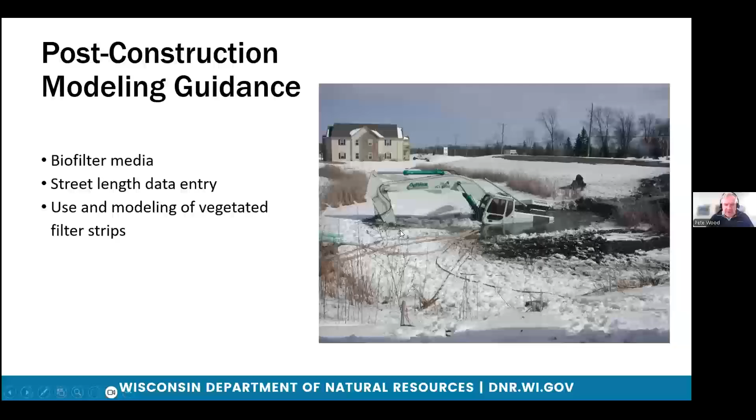All right, so this is one we've been working on, it seems like forever. Our MS4 swale modeling guidance is very old—it was published initially in 2010, so about 15 years old. We've been talking about doing updates for years. This is primarily for MS4s doing TMDL compliance modeling.

What we did with this guidance is keep it very similar to the existing guidance relative to grass swales, but over time, especially with TMDL monitoring going on, people have tried to model existing infiltration basins and dry detention ponds, and questions have come up. So we added essentially separate sections in this guidance for swales, infiltration basins, and dry detention ponds—again, this is to model existing practices for MS4 compliance. Hopefully it answers common modeling questions we get.

Another change we're making in this guidance is putting some criteria in for swale infiltration rate field testing. Some of you who've done this kind of work know it's become very popular to better quantify the value of infiltration in existing grass swales. We did try to include some criteria about modeling existing grass swales in the infiltration site evaluation tech standard 1002 a couple years ago. We got a lot of feedback on that, so we ended up removing the MS4 portion from that tech standard, and now we're bringing it back.

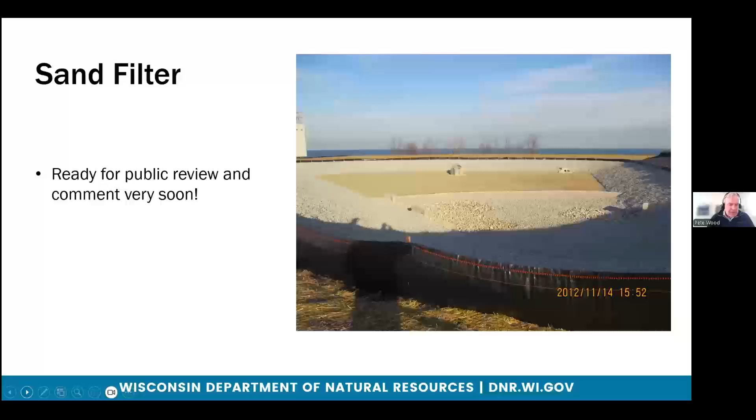That's coming soon. Related to that, the sand filter tech standard not only tries to eliminate that liability with compost and phosphorus, but also to have some enhanced phosphorus options. We're going to do this in the form of a tech note. The tech standard is going to mention additives, things that could be added to the sand to actually increase phosphorus removal. We're developing a tech note to go with that to talk about some specific options.

This particular product, zero valent iron, is an iron aggregate that has been shown in research in Minnesota to be quite valuable for enhanced phosphorus removal. This particular product out of Connelly is approved for use in Wisconsin based on toxicity testing. It's being used in Calumet County on a project, so it could be used right now. In general, it's about no more than 3 to 4% of the total mix would be this iron aggregate, and this stuff comes out of Chicago. So based on the research done in Minnesota, we have a lot of hopefulness with this product working.

Another one we've been talking about is biochar, which is just wood ash processed in a certain way, added to the mix the same way. For both of these products, the city of Milwaukee is going to start a project by retrofitting an existing biofilter to become kind of a research facility. We've been trying to give them some guidance on what types of engineered soil mixes should be evaluated. Right now, they're definitely going to have a couple different ways of introducing the iron filings, and also recently it was discussed trying to do a filter bed that also had the biochar to actually quantify the value in Wisconsin. So that's going to be a work in progress in the city of Milwaukee.

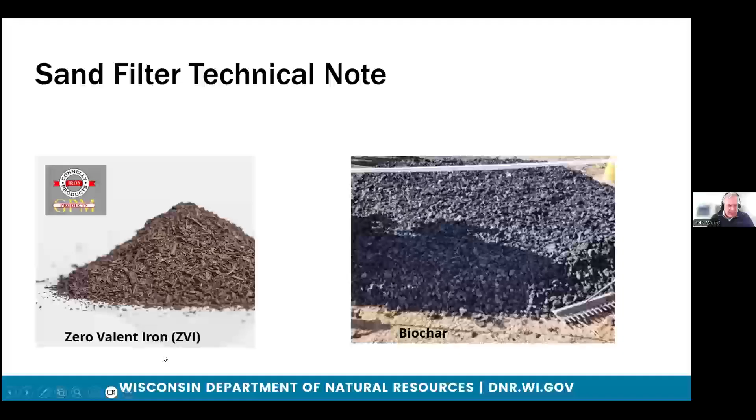There are a couple more, and in this whole webinar that Waukesha County is putting out, there's going to be more discussion about the enhanced phosphorus additives. Amy Mincer has been working on these tech standards, and they're pretty much done also, but she wanted to give a little delay so we don't have essentially four tech standards for public review at once. She's anticipating these would be posted for public review in a couple months.

The first one, and I'm not going to talk in great detail about it, is based on a flow, almost like a wastewater treatment idea, where a coagulant, alum in most cases, is added to the stormwater, mixed in a certain way, and then introduced to a stormwater pond. Phosphorus and TSS removal would be enhanced, so more treatment would occur than with a standard stormwater pond.

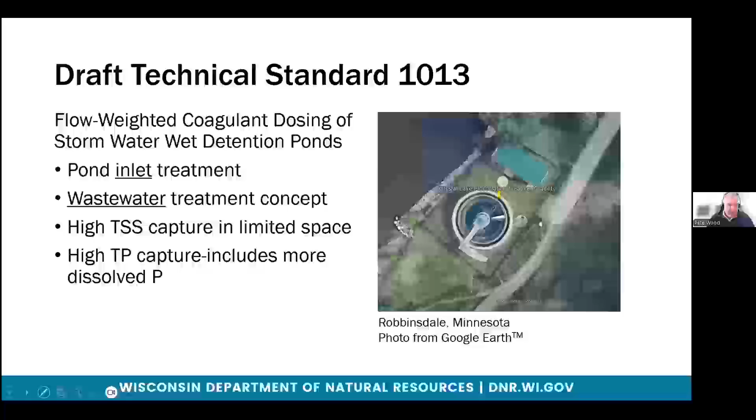So that one's coming, you'll hear more about these options again. The second one is more of a passive application, whereas the first one was active. This is more passive, where you would actually dose a stormwater pond, and you'll hear more about this.

It's more of a maintenance idea, similar to a lake treatment concept, where you're trying to use the coagulant to keep phosphorus from being lost from previously settled sediment. There's research showing stormwater has phosphorus in it, and the settleable part sits at the bottom of the pond, but under certain conditions it can be released. That's what this one-time coagulant dosing event would help resolve.

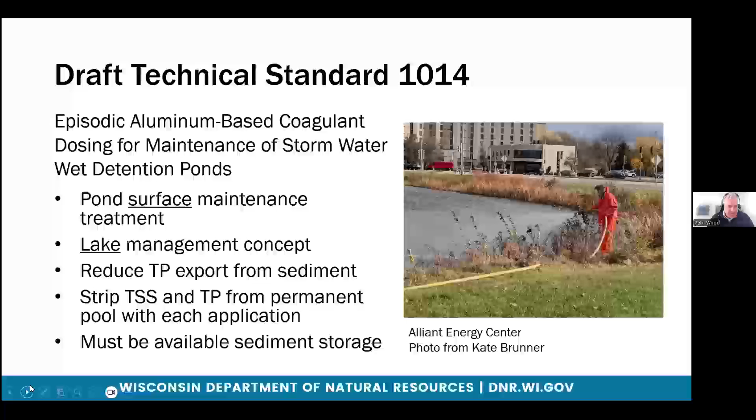A couple things we're going to be working on over the next couple of years: we're going to take the soil loss and sediment discharge guidance document, which is based on the USLE spreadsheet that generated that requirement. We're going to take another look at that and turn it into a tech standard, maybe coming up with a whole different concept. I think anybody who's worked with this tool, including within DNR, knows it hasn't been as smooth as we hoped. It's been used for many years.

I think we're going to talk about some alternatives through that process, maybe a different way of doing this, and add in some other concepts like construction sediment and construction sequencing protocols, having this tech standard cover some larger bases. So that'll be something you'll hear about, but as you've seen with previous tech standards, it takes some time to get through that.

Another one I mentioned last year is our urban soil health team that we pulled together to look at how to improve the infiltration capacity of existing urban soils. That team was able to generate a foundation for a tech standard, so we think we're pretty far along, and because we've done that initial work, we could get moving on a tech standard and get it done fairly quickly.

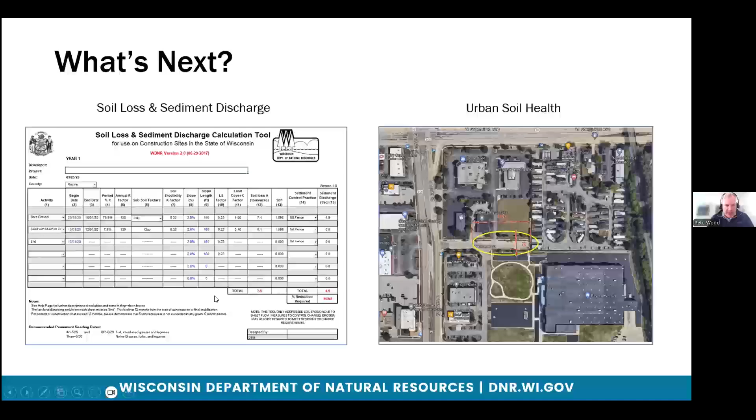Now, finally, I'm going to wrap up with some MS4 updates, both from a statewide perspective and a local perspective. I'm not going to cover everything — as you guys know, it's a big program — but just some of the points of emphasis.

I was able to get some feedback from Brooke Robinson, our statewide MS4 coordinator — some of you remember her locally. We've been doing audits around the state for a certain number of MS4s, and this is what she reported for the common issues coming up during those audits. I want to let everybody know, so if you're an MS4 manager, these are things you can start thinking about to be ready for a future audit when DNR comes.

One issue, maybe not surprising, is MS4 construction site inspections. One problem they're finding is the municipality not inspecting sites per the permit, at the frequency prescribed. Another issue is MS4s aren't doing inspections of their own projects as we'd like to see, like road projects or things like that.

Another item is management of street sweeping and catch basin waste. This is always an issue for any municipality — even if you're hauling it to a landfill, what do you do in the interim, how do you dewater? This has been coming up, whether it's being appropriately managed, because it's highly contaminated, considered a regulated solid waste, so it has to be handled differently than soil. We want people to be sensitive to where they're dewatering and how that's handled, because it's essentially a wastewater coming off that material.

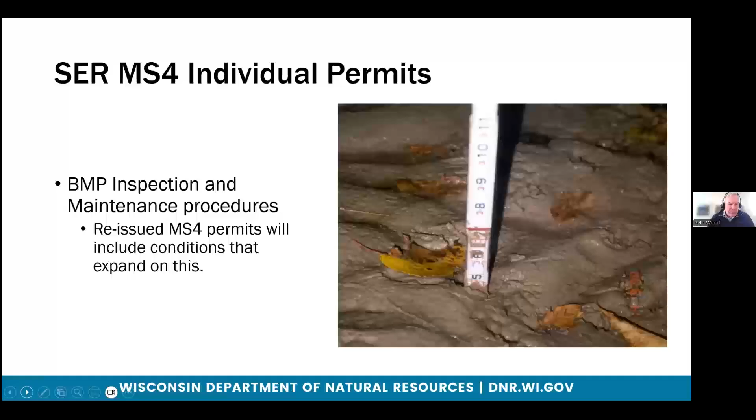This is something I got from Sam also, and it makes a lot of sense when she mentioned the big picture - everyone understands this. We've been permitting these BMPs for development projects for the last 30 years. A lot of them are in need of maintenance, and that's where the hard part is - they're not going to continue to function to their best ability unless someone's inspecting and maintaining them.

So that's Sam's whole focus on the permit drafting - to have a municipality go through and be able to describe every step that's needed to result in a BMP being maintained on private property.

One of the concepts she's including in the permit language is making sure that someone identifies who's going to be doing the inspection and maintenance of a particular private BMP - whether it's the municipality, the pond owner, or the private owner of the BMP, or some combination of those. That's one thing she's seeing lacking - a clear identification of who's responsible for what.

And then there's the process of verifying - let's say a homeowners association is responsible for doing the inspection - that the municipality has a procedure to review that information, whether it's submitted from a private entity or not, and then figure out what steps need to be taken if something is found, like a pond in need of dredging. What is the procedure within the municipality to make that happen and compel compliance, as she's been calling it.

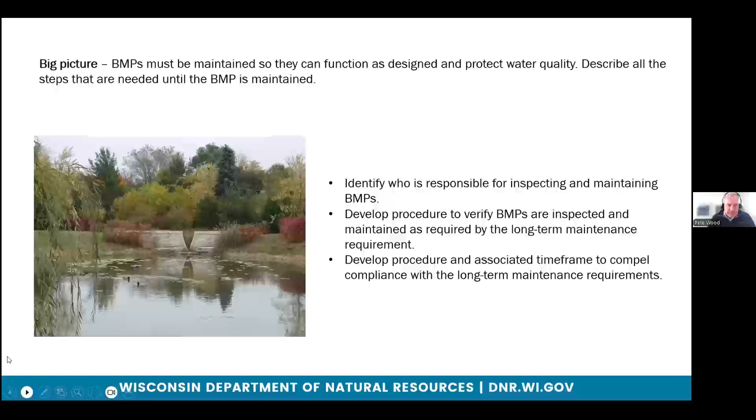So these are all things she's trying to develop better language to address in the permit itself. Tying into this, in the slide from last year, we had implemented over the last year - these tasks here are high-level thoughts on how we get to a better way of doing long-term maintenance, guiding it from the state level, so that we are actually having BMPs maintained.

And we made some progress. We had an intern who looked at all of the current plans we have on record for how municipalities deal with managing long-term maintenance on private facilities. Unfortunately, we had a really hard time finding really well-developed programs.

That's one of the reasons why Sam's trying to clean that up. Even though we know municipalities are doing this work, DNR doesn't have a lot of access to really complete plans where we fully understand how the municipality is doing it. So we're going to try to move forward on that and provide some benefit.

Grace Barlow is going to talk at the end of the webinar about the MS4 BMP menu, so we're going to try to use that website to put up examples. This would be part of that. We're working with groups like Sweetwater and Root Pike WIN, who are also working with municipalities to tackle some of these things and improve the whole program, even though it's going to take many years.

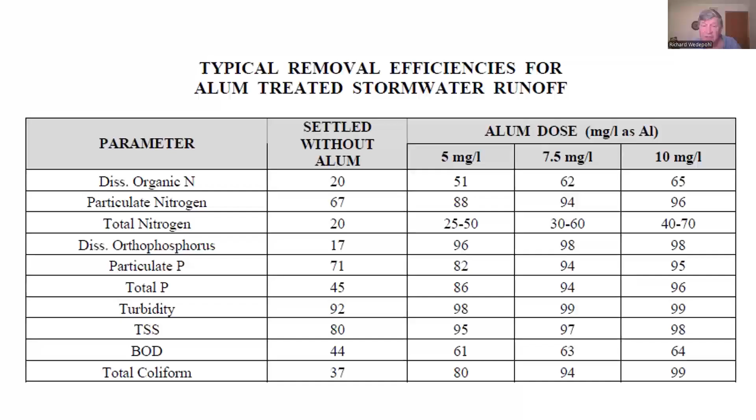We'll meet here to have a beer, come up with some great ideas, and several of the ideas we came up with here came about while we were having a beer. Sometimes we actually remember some of them.

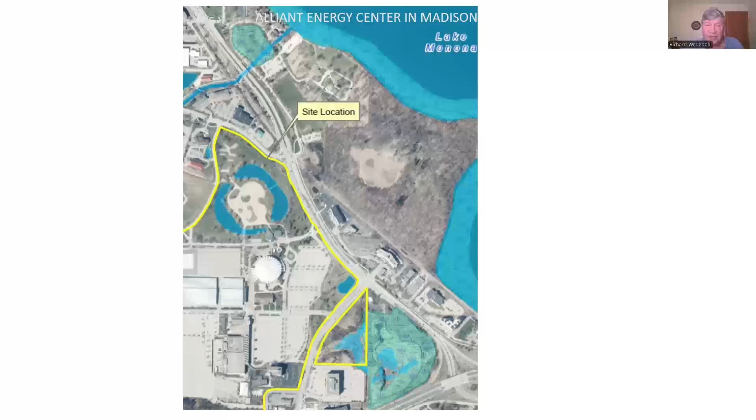All right, the project that Leif asked me to talk about: the Alliant Energy ponds, located on the Alliant Energy campus in Madison. Most of the stormwater flows in from the Alliant Energy Center into the west pond on the left-hand side, then goes over underneath the little bridge into the east pond. The east pond discharges into Lake Monona. This is a project that we ended up doing.

My friend Dave Marshall and I went out and looked at it and said, okay, I see why Kevin Connors—a retired land conservationist from Dane County who was filling in as acting director at the Alliant Energy Center—asked if maybe we could use alum on these smaller ponds, which are 5 to 6 feet deep. I said, well, maybe. He said, sure, it'd be nice to do something with these ponds. We've got the world's largest brat fest coming up here, with 100-some thousand people, along with a whole bunch of other things. It'd be nice to see if we can improve the aesthetics as well as capture some of the phosphorus before it goes into Monona. So we said, all right, okay.

Of course, we went out and took our samples, basically looking at total phosphorus. They're typical of the east pond, the secondary pond—total P was fairly high, 0.04. The west pond, where the stormwater came in, was fairly significant with phosphorus. The total area is about 5.5 acres, and these ponds are about 5 to 6 feet deep.

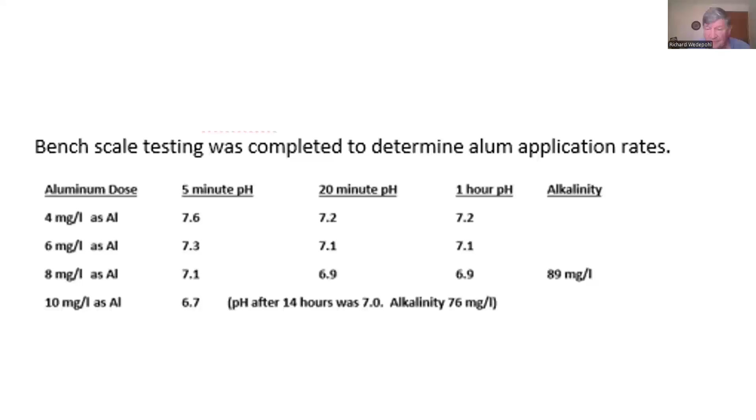The issue here, though, was Harry suggested, with ponds like this, you really want to get the sediment inactivated. How much should you put in? He said, well, you really want 40 grams per square meter of pond area. In lakes, people will look at as much as 50 to 100. They'll do sediment core testing and see how much phosphorus migrates out, how much you can apply to really lock up the phosphorus for a significant time frame in the sediments.

So we said, okay, we can do 10 milligrams per liter, no problem, keep the pH up to 6. But we'll need to do it 4 times to get this initial dose in these ponds to treat the sediment. So we had to wait till the alkalinity responded. We found out that the alkalinity from the sediments came back up, and we were able to retreat this pond within a week. So we spaced out 4 applications over the first season to get that dose we needed in the sediments.

All right, permits. I still don't know exactly when you need a permit for stormwater ponds. These ponds were classified by the Wisconsin DNR as lakes. They said, okay, let's get a permit. DNR has been permitting whole lake phosphorus and alum applications for many years now, and they've come up with a process, authorizing it under a low impact discharge permit. So it's straightforward, but it's still required a permit. So we went through the process and obtained a permit.

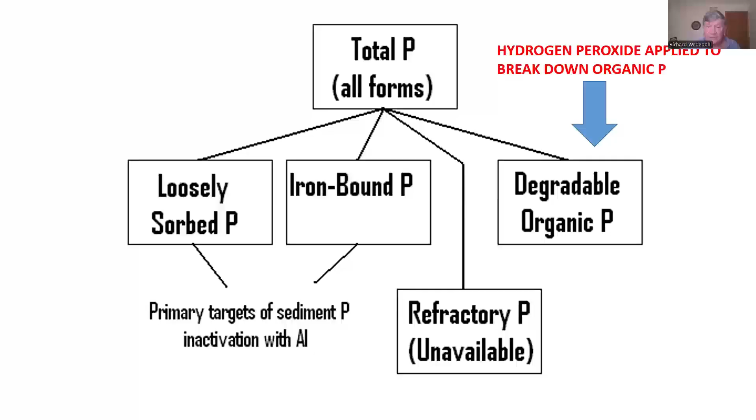So use hydrogen peroxide. I said, what's that? In Wisconsin, not many people are familiar with this, but this product, phycomycin, which is hydrogen peroxide, is labeled in Wisconsin. You can use it. It's an oxidizer, and it'll break down the algae and release all the phosphorus.

Well, why not use copper sulfate? We called an applicator, and he said, well, I'll just use copper sulfate. I said, well, copper's not as good, it doesn't oxidize it. With copper, you got to watch out for oxygen depletions as the algae decays. He said it's a little more expensive, but it's a great thing to use.

So we got another permit, an aquatic nuisance control permit, and hired an applicator. Here he is applying the hydrogen peroxide, basically with like a lawn spreader mounted on the back of the boat, and he just drove around the pond over all of the filamentous algae and applied the hydrogen peroxide.

It was interesting to watch. It did not take very long, just maybe 5 to 10 minutes after he applied it, and you can see how the hydrogen peroxide's breaking down this filamentous algae.

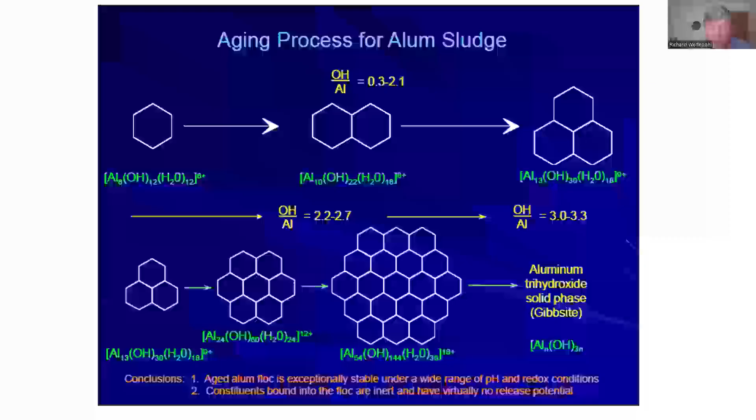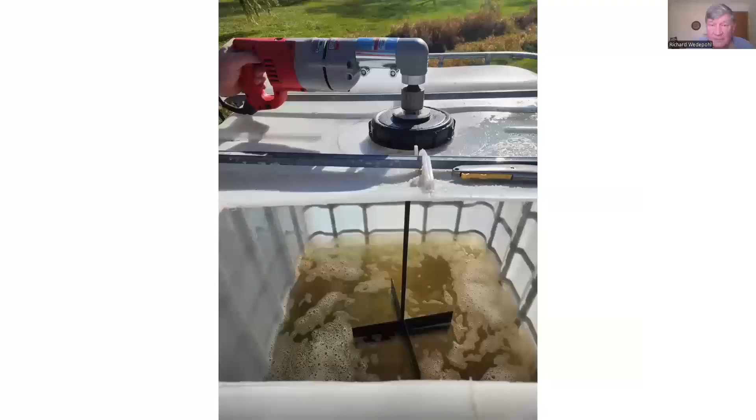One of the things we discovered is you've got to dissolve the dry alum. How much do you put in there? Well, you need about 80 to 100 gallons of water per bag of alum, and then you've got to use a paddle and mix it. We ended up paddling with a canoe paddle for a day and had a little problem dissolving the alum, and the local guy said, here we go. So they came up with this device, poured the dry alum into the container, and used it to get it dissolved.

Once we did that, we turned the pump around and sprayed the alum over the pond. This was a good site where you could access from shore, and you can see the floc developing there. You try to get it as evenly distributed as you can, but experience has shown that the floc will move around, and you get fairly good coverage if you spread it around relatively evenly. You don't have to be perfect doing this.

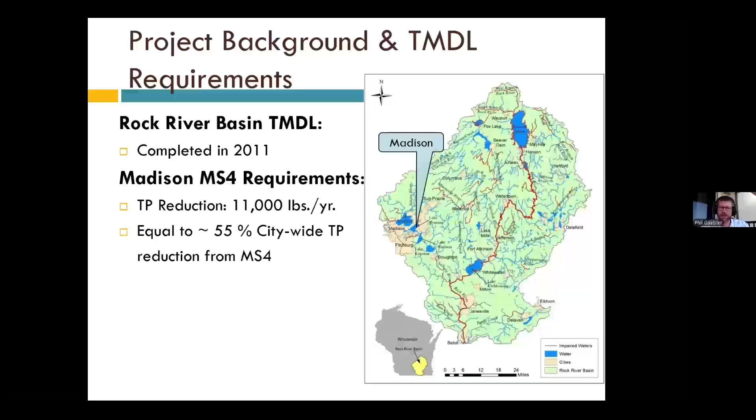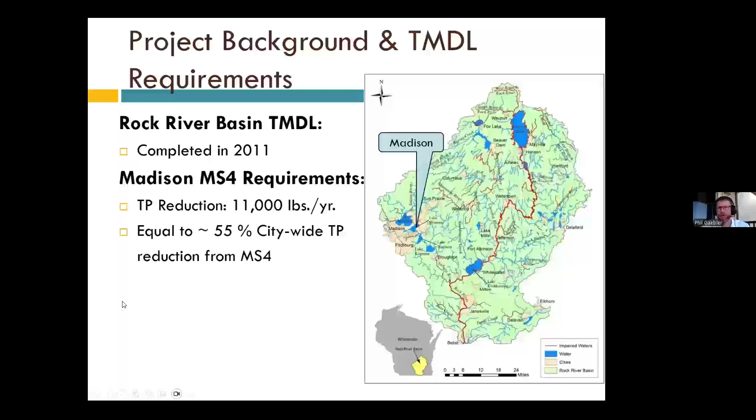There's also Lake Wingra in Madison that does not benefit from the phosphorus and sediment capture up in the Mendota watershed. That water bypasses Lake Wingra, so there's some effort and goals to reduce the phosphorus loading into Wingra. So if we look at the Marion Dunn Pond, it's over on the west side of Madison.

We have the Glenway Golf Course. If you've ever been there, some people call it Speedway Golf Course. But this area flows out into a small pond. It's a little bit undersized by today's standard, doesn't get 80% TSS reduction. Mostly medium density residential upstream. Pretty big watershed for the size of the pond, hence its low capture, but it's at 232 acres.

We really, at this time, didn't have any treatment upstream in this watershed other than street sweeping, and here that was monthly mechanical broom sweeping.

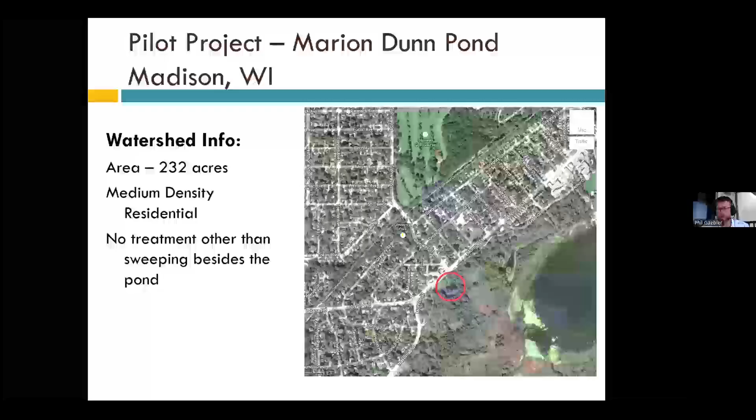If we look at that watershed, you can see almost all medium density residential, a little bit of commercial and a school on that far west side, and a large park in the middle. It all flows down and comes into the green area, which is Marion Dunn Pond.

Zooming in on that, we have a 4.5 by 8 foot box culvert. We then have the pond, and it has two outlets, 42-inch RCPs that then flow into moderately defined channels and eventually into Lake Wingra.

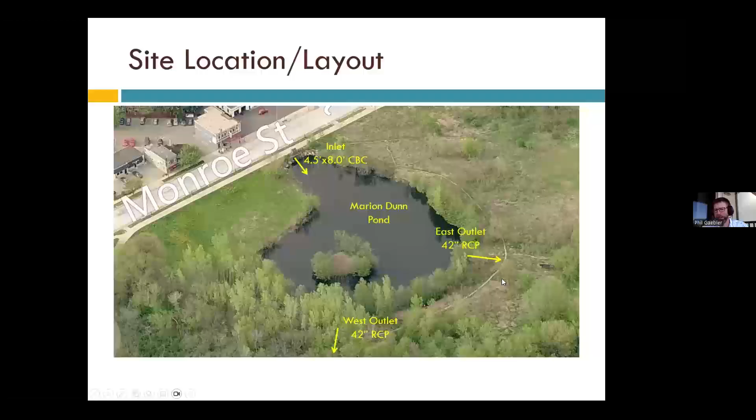We look at the existing water quality in that pond: relatively high phosphorus and orthophosphorus, moderately hard at 20 milligrams per liter, neutral pH, and some alkalinity in there.

We took some additional measurements, and they were in line with those historic values from 1990. We're up at 743 micrograms per liter of total phosphorus at our high count and down to about 357.

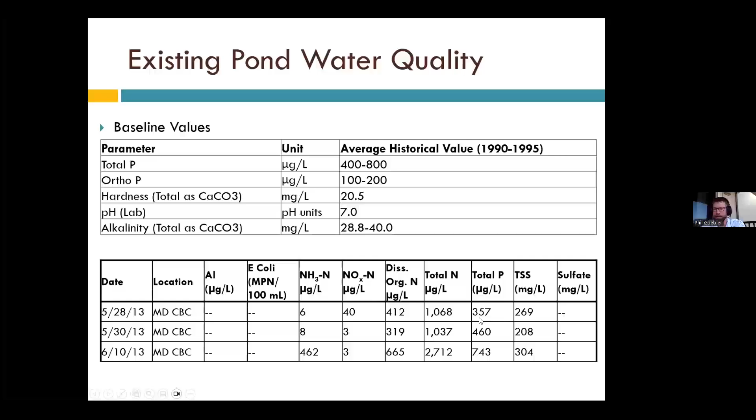This pond is also demonstrating excessive phosphorus and nutrient cycling. There's a lot of algae growth in this pond.

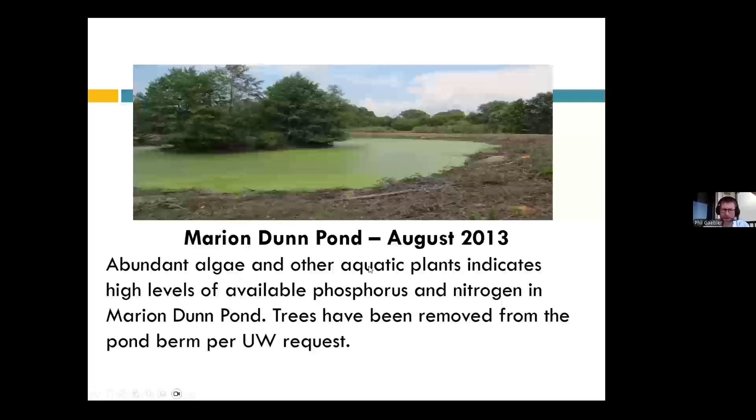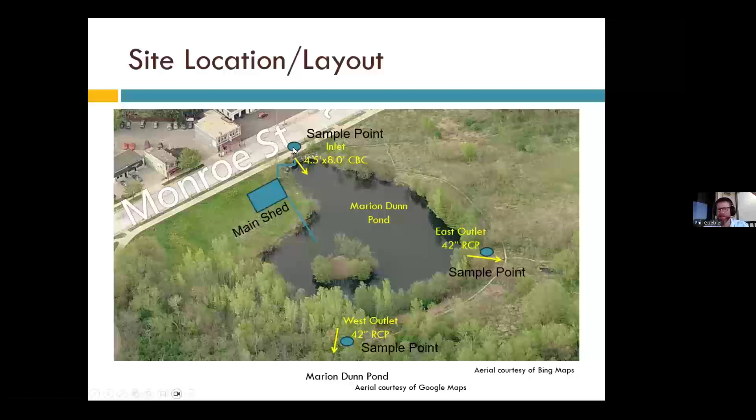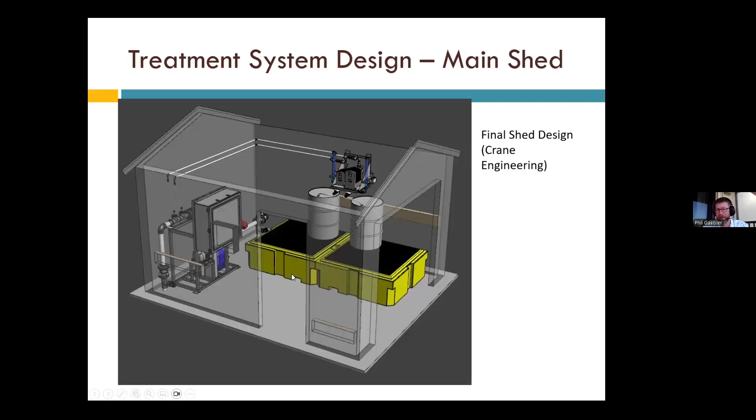We look at a schematic of this little treatment system. We have our pumps on the left. We had alum and a buffering agent, which I have in the next slide and don't remember the name of, and then a couple small pumps to feed that into the main mixer. And then we had containment so that if one of these ruptured, we would hold all of the volume of the barrels that were on these extra storage pallets.

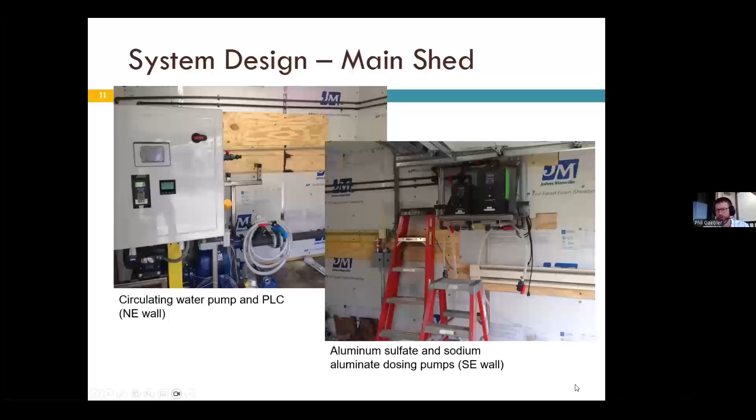Here's an interior photo of that circulating pump and our control center. The dosing pumps are these two small ones up on the wall. We had the aluminum sulfate on one pump, and then the sodium aluminate. If the pH dropped too low, we would switch over to that. Here we have the containment for both barrels of the sodium aluminate and the alum.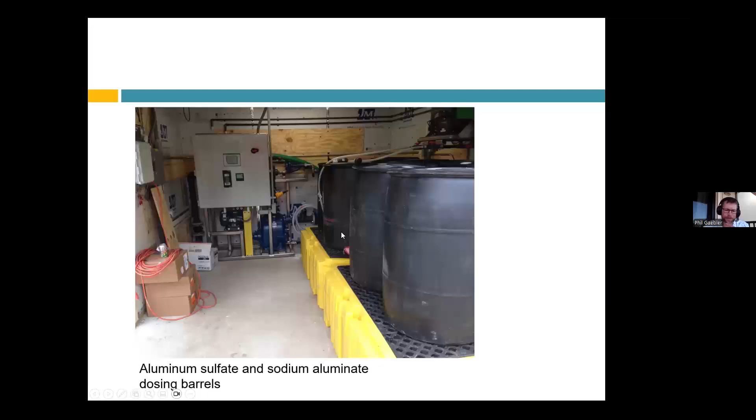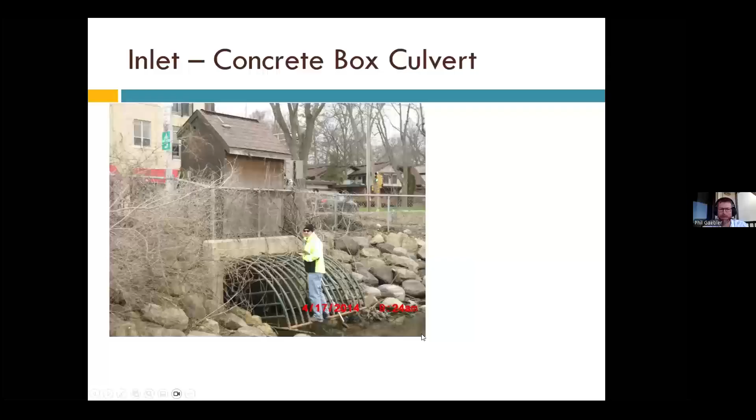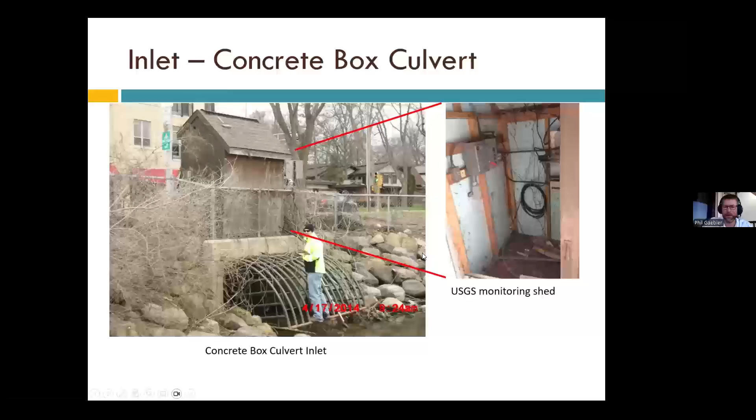Here's that inlet. It was that large box culvert. It had a gate on it, which we took off. That's my supervisor, Greg Fries, out there doing the dirty work. And then inside of this USGS monitoring shed, otherwise known as the mouse condo, we put in ISCO sampling equipment and did flow weighted samples of the flow coming in, and then it was the same on the outlet.

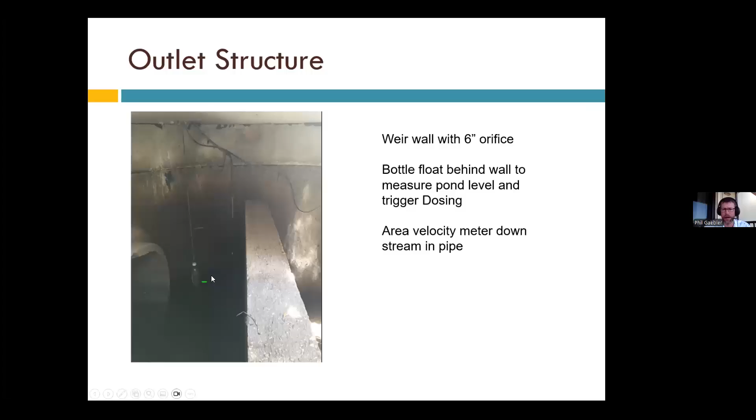The outlet here is a little tough to see, but this is a large storm sewer access structure, and we had a weighted bottle here on the upstream of a weir wall. This weir wall had a 6-inch orifice in it, and then it had this permanent pool on the upstream side, with a weighted bottle with a chain that would do the level recording with data loggers, and then there was sampling equipment. You can see the hoses on the back to capture water as it went out of the system.

And an area velocity meter downstream in the pipe. So here we are, you can see that gate's gone from where Greg was standing before, replaced it with some PVC pipe. During rain events, this only was active while flow was coming in and the pond was at an elevated state. We would dose with the alum.

It would mix in the pipe and then be discharged into the incoming water. You can see that it would start to form some floc and some foam pretty quickly and then move out into the pond.

So if we look at one of our better monitored and sampled storms, here we have the August 28th, 2015 event. This storm came in 3 peaks, and we were able to take 7 samples on that first wave, 6 on the next, and then 4 more.

And then we were a little selective due to budget on our outlet samples. We didn't run all of those, but we did get representative outflow samples. This was one of our better monitored storms. There were a lot of issues we had to work with on this, but this one is kind of what we were hoping for.

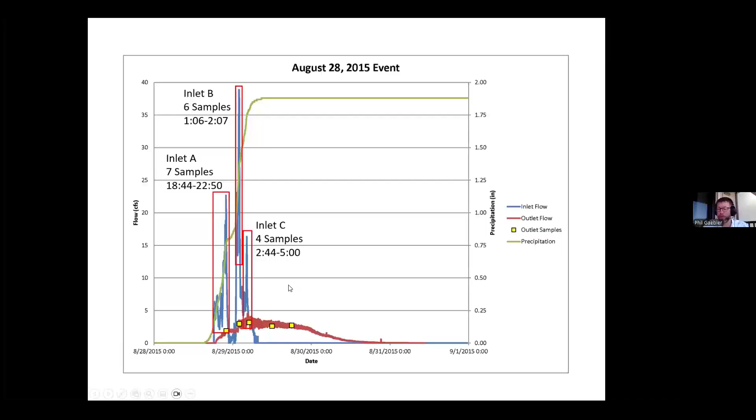Lots and lots of samples, okay phosphorus reductions. Some of them were quite high. And then if we look at that August 28th, 2015 event, that was about a 2-inch rainstorm, putting it right at the 1-year recurrence interval. The alum dosing was sized to be able to fully treat a 1-year event.

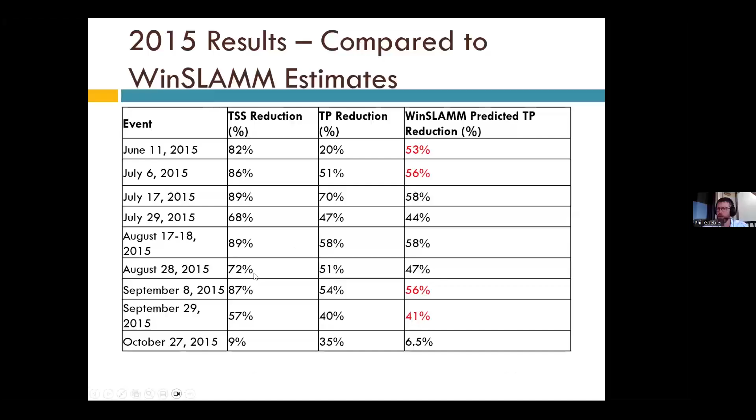Moving on to 2016. By 2016, we had figured out a couple of our issues. We knew we were getting some backwater effects in the pond. We had a lot of issues with clogging at the outlet structure. We put some Band-Aids on our system to try to make it work better.

And for some of the storms, we actually were able to get it to work the whole storm, and maybe nature cooperated a little bit during those events. We had, when we compared to WinSLAMM, better average increases over the WinSLAMM predicted values.

So how does that make sense? If you look at that August 28th storm, when we go back, we think we ran out of alum at one point in time during the event. So we only dosed the front end of the storm.

But we didn't have a float inside of the alum tank. So the pump was telling us it was pumping. Everything we were looking at with our telemetry said, hey, this is working fine. And then we got the results back and thought it was odd. Also when we went out there, we noticed that the alum tank was empty.

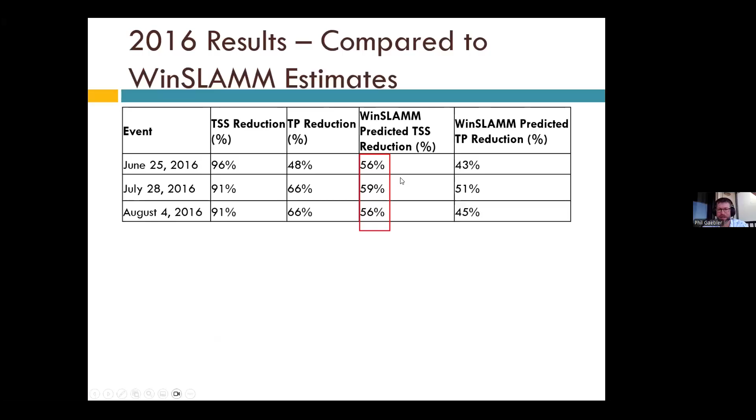So we definitely had some startup pilot issues, but by year 3, I think we had worked through these. This table right here shows that we were able to go from a predicted 43 to a 56. We're getting about a 10% increase in our total phosphorus capture. Oh, that is total phosphorus, not TSS. I'm sorry, I miscircled the column, or mislabeled that column, or switched those. Sorry.

So the summary is that although this is really variable and pretty messy data, it was compelling enough that we decided to explore a much larger, full-size chemical treatment for stormwater in the Yahara watershed. This was the Starkweather Creek coagulant study, which is available, and there are presentations out there you could look at.

Essentially, we're taking a quarry pond and converting it into a treatment pond that would take storm flow out of Starkweather Creek, dose it with aluminum coagulant, design it as an upflow filter, and then capture that sediment.

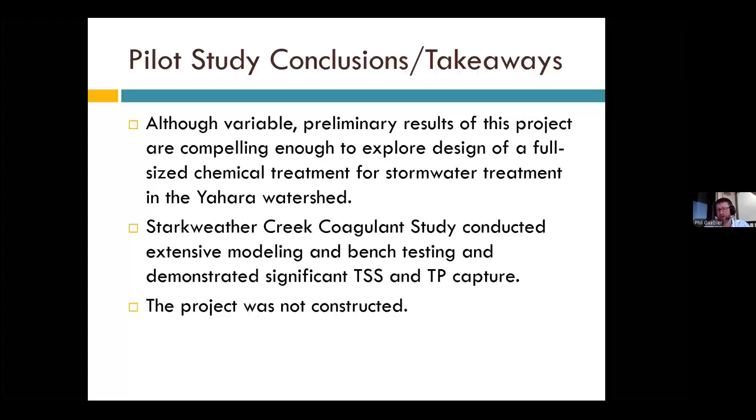So we learned a lot in this project. One is that having this complex triggering mechanism—we had to have flow in, we had to have the pond level at the right level, and it would then adjust the dosing of the alum—these things are complex, and when you add complexity, you add opportunities for failure.

This is one form of failure: the pump stayed on and continued to dose the pond with alum after the storm inflows had stopped. We had to run out, turn off the pump, and figure out what was going on. So telemetry is a must. If we didn't have this set up so that my phone gave me an alert, it would have been a problem—we could have put all the alum in the whole tank out.

Another issue: this watershed had a lot of coarse debris. That picture we had before showing all that debris along the shoreline—it did not decompose in the pond over the 3 years we did the study, but it did get stuck on our outlet, again and again. It clogged both the 6-inch orifice and the gate on the outlet pipe. We ended up putting a debris guard around the edge to try to hold it and let it fall into the pond. But if you got a storm that went over that debris guard, it did nothing.

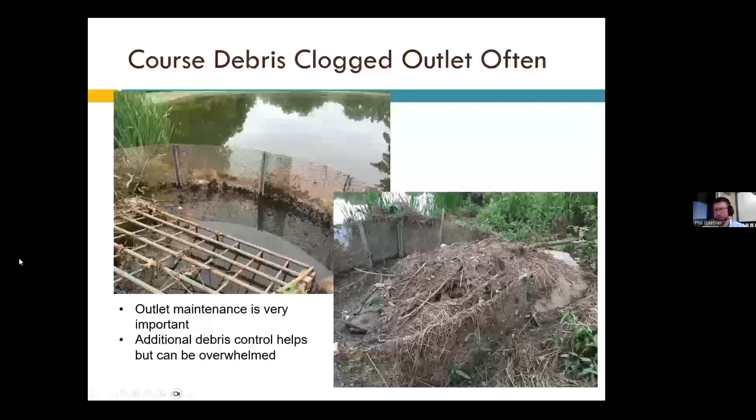And this is not a good pond to monitor when you have an outlet structure that looks like this. So maybe picking a pond with less vegetation, and not doing the vegetation maintenance right before we did the study, would have been a good idea. But on the flip side, ponds with high organic loads are potentially worse phosphorus providers.

The alum supply and winter storage is something that's pretty critical if you're going to go down this road. Alum freezes at a warmer temperature than water, so you shorten your alum dosing window unless you have a heated shelter—you don't want your barrels to freeze, or freeze in your pump. We ended up having to winterize this every year. If you could have heated it, it could have stayed, and you would just have to blow out the lines.

If you're going to remove the alum, it's really important to have easy access for a forklift and trucks. That's something this site also did not have, so it was a real pain to get things in and out. Again, it was a pilot study, so all of these things weren't vetted and thought through that much—we were like, well, we can endure this for a little bit.

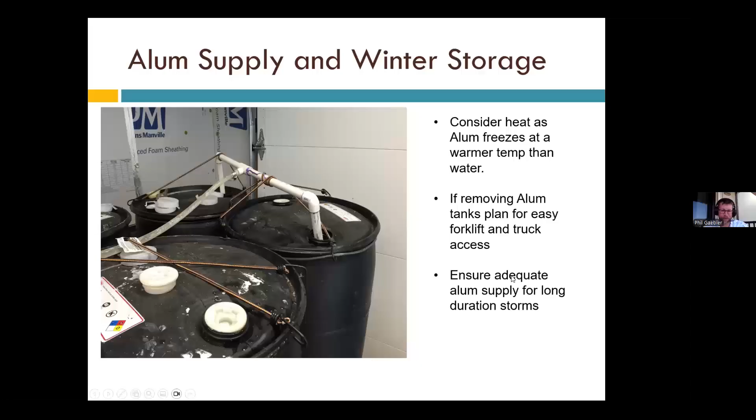Last, consider your outlet structure design. This pond had two 6-inch orifices through a large weir wall.

I know we have many private practices that go down to a 2 or 3-inch orifice. If this study taught me anything, it's that a 6 or 8-inch orifice is very easy to clog. We likely have a lot of ponds out in the world that are not functioning as designed because those orifices are partially or totally blocked. This pond would stay at the top of the weir wall for days before enough could flow through the clogged outlet structure.

Here's my conclusions and takeaway. The aluminum-based coagulants dosed during rain events can increase your TP and TSS capture. There's potential benefit out there, but nothing's free. The added complexity makes these systems more prone to failure than passive ponds. And with the guidance for aluminum, you have the potential to now go past your permit requirements by overdosing your ponds with aluminum.

You want to make sure that the additional maintenance effort—checking all those pumps, the sensors, the increased notification of clogging that might have been missed—all that is rolled into your cost-benefit analysis before you put forth money to implement one of these systems. I think all this complexity also pushes you towards wanting to focus this on a pond that treats a larger watershed.

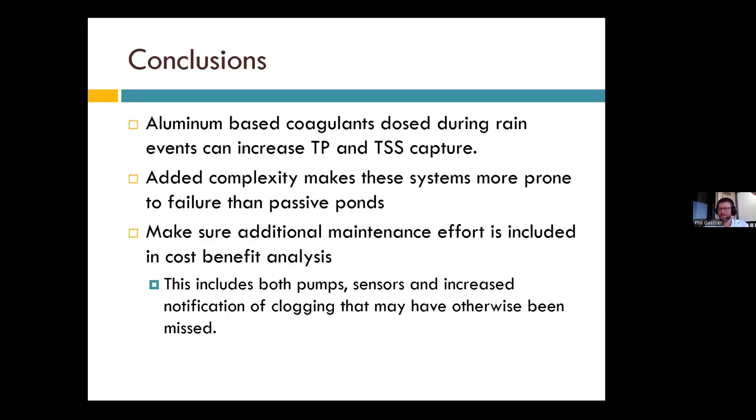So I take it the city didn't consider continuing to operate this system for the long term? It was just a pilot and got the information that was needed, and then it was dismantled at that point. Correct. This was a short-term project from the beginning, and some of the maybe shortcomings of the design is that we just said this is a 3-year project. It was on Arboretum land, and they didn't want that main shed and all the piping on their pond forever. So that was known from the beginning.

Well, I don't have any audience questions, so if you send me the contact information for the place where you're staying, I'll pay for some Mai Tais. Well, thanks, Leaf. I hope people learn something from this.

I will say the amount of debris that came through that pond was shocking to me. It's a mature watershed with a lot of tree canopy, and the Glenwood Children's Park, which had some erosion issues of its own, all ended up in this pond. That pond got pretty beat up over the 3 years we were out there. I was amazed at how many sticks, leaves, and gravel we pulled out of that pond.

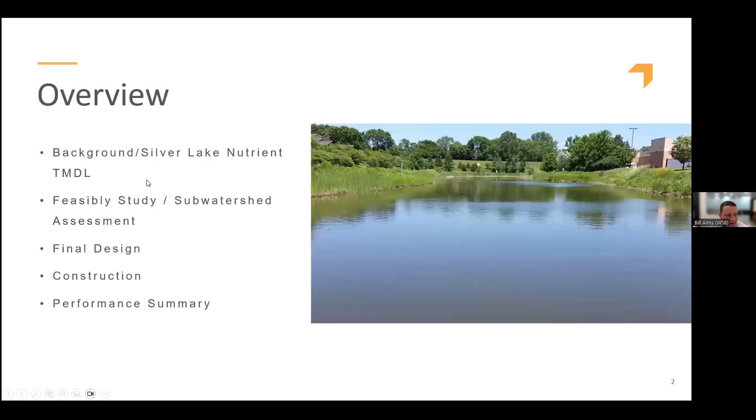Let's see if... all right, going through an overview. So the project location I'm presenting on is in a first ring suburb just north of Minneapolis, St. Paul downtown area, in the community of St. Anthony Village. This alum treatment project, pond project, was constructed to meet a TMDL for Silver Lake, which is in the Rice Creek watershed.

Silver Lake is shown just north of Minneapolis, in the city of St. Anthony Village. It also has some tributary area from the city of Columbia Heights, just to the west of St. Anthony. Surface area for this lake is about 70 acres, with a subwatershed of just under 700 total acres. This lake receives upstream drainage from Hart Lake, and then has an outlet which discharges through a couple county ditches through Rice Creek, and ultimately to the Mississippi River.

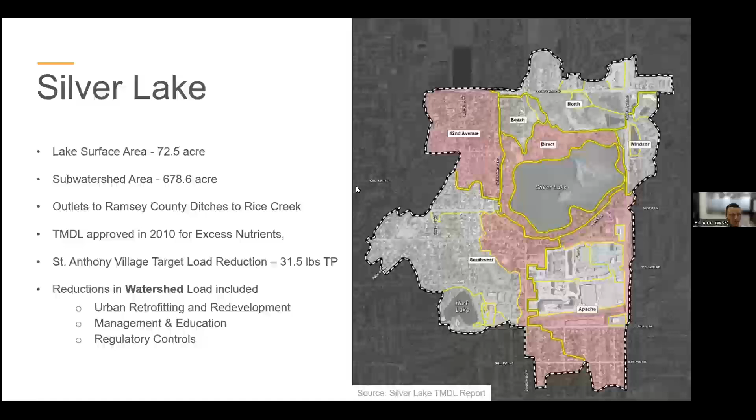I don't know why my slide advance is moving so slow.

Salo ponds are two traditional NURP stormwater ponds that were constructed with the Apache subwatershed redevelopment. There was a Walmart in the southwest corner, a Cub Foods grocery store, and other downtown redevelopment. Over the past 20 years, this watershed has seen quite a bit of redevelopment turning over, but the stormwater ponds already in place continue to serve and meet regulatory treatment obligations. These two ponds are shown at 60% and 48% removal of the phosphorus that routes through them. The pond sequencing goes: the south pond, slightly elevated, flows north into the north pond, and that north pond moves up through Silver Lane into Silver Lake.

There's about 80 pounds of phosphorus coming off of the two subwatersheds to these Salo ponds, and ultimately about 30 pounds of phosphorus leaving them. That was identified through all of the various options and alternatives as the most attainable phosphorus to target with the treatment project.

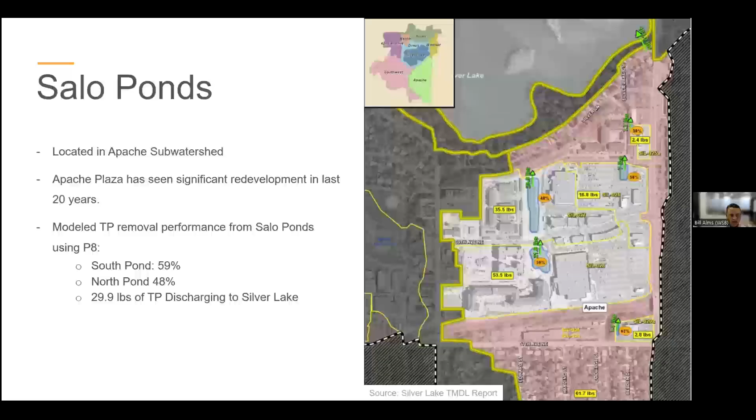Similar to some of the other more temporary projects previously presented, WSB has created a portable flocculation treatment system. It's basically a roll-off dumpster that we fabricated with interior components to pump water from the water body, inject with alum, settle, and then pump back into the pond. Whatever flocculant or phosphorus was removed as part of that process was connected to sanitary sewer and discharged. This operates very similar to a water treatment plant system using alum, as opposed to a lot of alum application in stormwater ponds, where you have direct injection in the pond and then either settling out in the pond itself or inactivating sediments in the bottom of the pond. This process is grabbing that phosphorus and removing it from the system entirely.

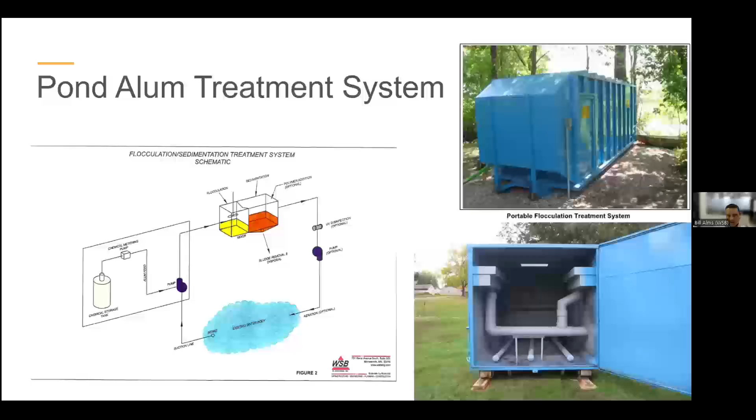Our feasibility study looked at a number of locations on these ponds for where the system could be constructed. Of that 29 to 30 pounds that was leaving, our goal was to find opportunities where we could remove up to 26, 27 pounds, which was the overall project target.

This project was also favored because of really getting after the dissolved phosphorus as a direct source into Silver Lake. Removal of that dissolved phosphorus was identified to have the greatest impact on improving the water quality in Silver Lake.

As a result, we applied for several grant funding sources. In Minnesota, there's a grant source called PSIG, Point Source Implementation Grant Funding, which is targeted specifically towards projects to achieve TMDL compliance. This project, and then the local watershed district, also contributed some money through their cost share grant program. Overall, the construction cost was bid at about $430,000 on this project back in 2015. All said and done, the construction cost of the project ended up being at $450,000. We were able to get 45% of the project funded through grant dollars.

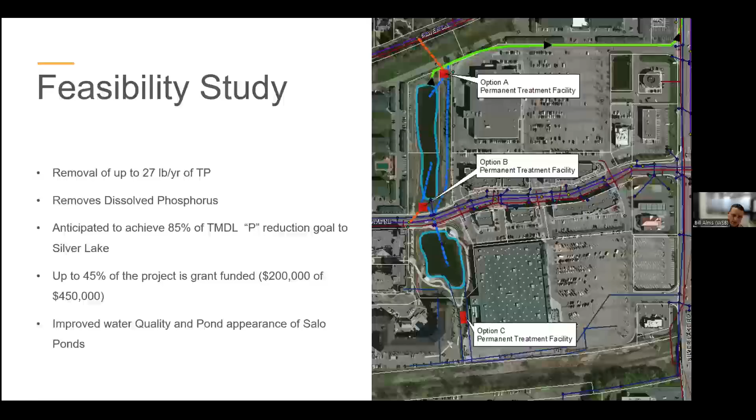Similar to some of the previous presenters, we did jar testing. We looked at straight alum, and then we looked at an alternative that included a coagulant or polymer to aid in coagulation, from Hawkins, a chemical manufacturer here in the Twin Cities that does a lot of work in treatment plants. AquaHawk was the product we ended up selecting. The initial recommendation was the third jar test at 125 parts per million to get the concentration down to 0.03 milligrams per liter total phosphorus.

What I'll talk about in the results, we actually found that with this polymer we are able to use a significantly lower dose, which is advantageous. Alum costs money, especially when it has a coagulant in it, so the more we can lower the dosing and get the same treatment results, the less O&M costs we have to provide, and the longer between refills in our alum tanks. Overall, the goal is to get the biggest bang for the buck without overdosing and wasting chemical.

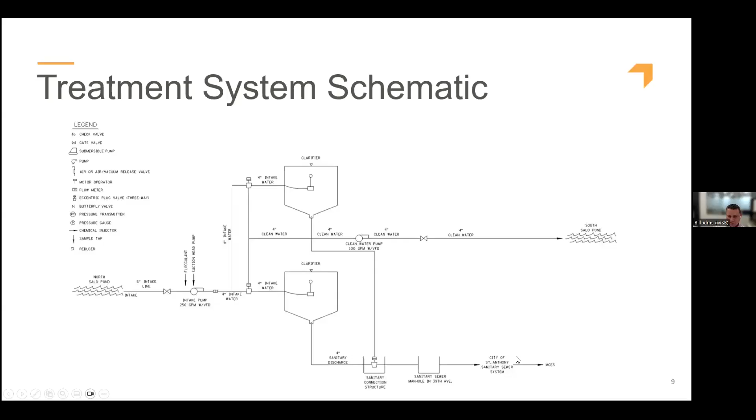This is a plan view of that same schematic where the intake pipe, coming from the northeast from the north pond, goes into the vault, into the two holding tanks, and then is pumped down to the south, with the sanitary connection line running into the street shown.

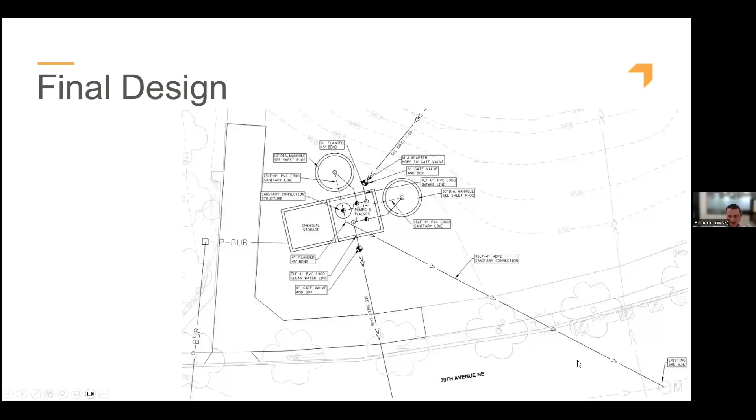These are some of the design drawings. On the left is that clarifier, the 120-inch, 10-foot diameter manhole clarifier with the floating strainer on it, and the sanitary connection at the bottom of the tank. The cross section on the right shows our two holding tanks, the sanitary valve at the bottom of the vault, and the pumps that pump in and out on the left.

We had originally set this system up to have both alum and caustic soda. We didn't know at the time how much pH would be an issue or how much buffering would be required to make the system work.

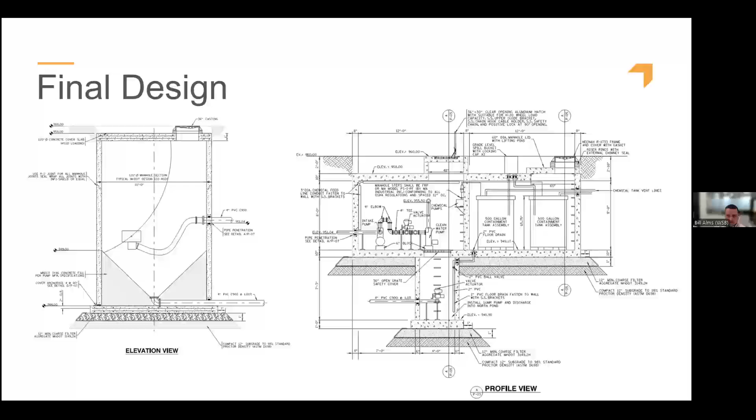The nice part about the alum with a polymer is that it can be used at a very low dosage, so it doesn't significantly change the pH of the water. By using lower dosages, we actually never filled the caustic soda because of its corrosivity. We left it in reserve, and so far we've been operating for 10 years and have not needed to utilize that. The benefit is we now have two 500-gallon containment vessels that could be doubled up or used for more alum if needed for expanded treatment.

Moving into construction on the system, in the top left corner is the fused HDPE intake that was dropped into the bottom of the ponds. We put these in to elevate above the bottom so we wouldn't suck a bunch of pond sediment in with our intakes running constantly. The water basically pulls up just a couple feet off the bottom of the pond, and the discharge into the south pond is very similar.

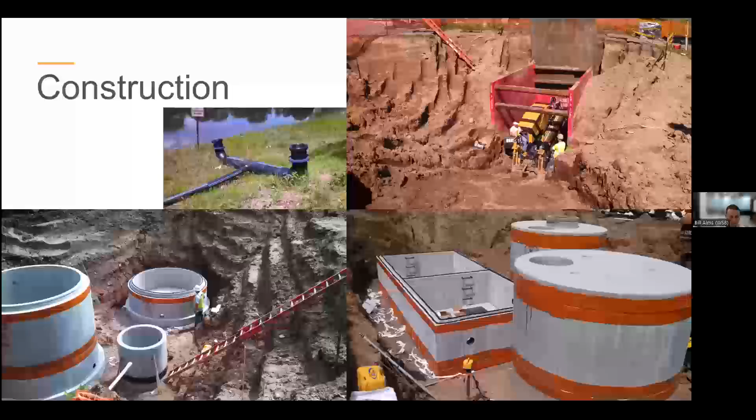The city had just recently constructed 39th Avenue where the sanitary sewer was going in, and as a result did not want to open cut or tear into that sanitary manhole to connect. So they pushed to directionally drill that sanitary outlet line into the street. In the bottom right, you can see the two clarifiers and the treatment vault box, which is set on top of a 48-inch manhole where our sanitary valve is located.

In the top left corner is the blue pump with the motor—that's the intake pump. It goes up, and you'll see the first three-way valve on the left. In the bottom left corner, there are two three-way valves that go out to the clarifiers. On the right side is the effluent pump, so you can see the water moves almost horizontally through this vault until it hits the pump and then goes out to the south pond.

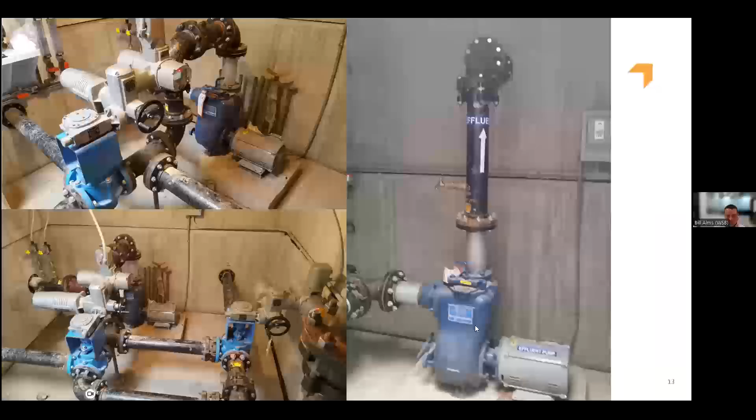Top left corner here is a picture of what it looks like. Obviously, we were in the middle of startup testing here, so it's a little bit messier than what we usually see out here. You just see a couple series of manhole lids and aluminum hatches, and the control panel is all that was really visible in most conditions.

We did construct these clarifiers. We have these large diameter, 36-inch diameter lids, which are nice if we need to get down in and do maintenance in the vault. However, they are pretty big to remove and open. So we added little 12-inch inspection ports to be able to drop sludge judges in to check on how flocks were forming in the bottoms of these vaults.

The bottom pictures here show our chemical treatment skids. Again, they're set up to have both caustic and alum, but they also can be combined and both pump and kick out alum into the treatment system. And then the three-way sanitary valve is in the bottom right corner.

So startup testing on this system - these images in the bottom left corner, not quite as crazy green and full of vegetation, is actually pretty good in these ponds, but you can see the overall clarity and dirt and other sediments that are in that pond or in that intake water. And then the jar on the right is what the water looks like going out. Wouldn't say it's drinking water, but it certainly looks that clarity compared to what's being returned back to the pond.

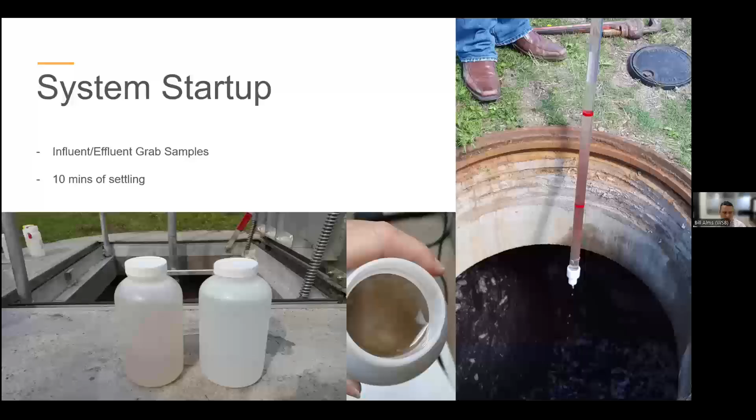So what's nice, or a good visual in this image, is that this was after the tank was filled - the influent water was dosed with alum, the tank was filled up to the top, and then after 10 minutes of settling, you can see almost all of that floc and sediments, along with the alum and phosphorus that was bound to the alum, settled to the bottom - really consolidated nicely with the addition of that polymer.

Some of the results here on the treatment system: the TMDL concentration assumed for these ponds was modeled at just below 0.19 milligrams per liter. We had some pre-sample data and weren't quite that high with some of our pre-project sampling - we were probably within the 0.12 to 0.18 range - but the TMDL was all built around that 0.19, so that was kind of what we used as our benchmark.

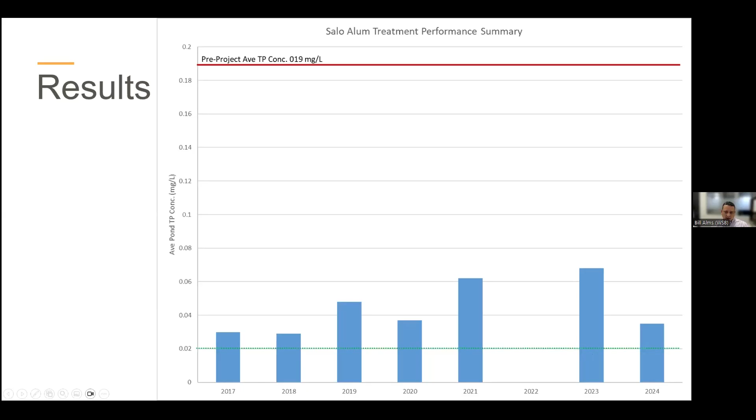And then the green line here represented that objective of removing that full 27 pounds, or 90% of the dissolved fraction. While we didn't get that good of performance, we certainly still showed a significant reduction in the phosphorus concentrations in these ponds. And we ultimately, as we looked about this and thought about it and studied the performance, we found that when you look at the ponds as a whole, you've got two sedimentation basins.

And then you've got this alum treatment system as a sort of secondary filter, or an addition to it. That's really the best way to look at it, because when we get a rainfall event, it flows into these two ponds.

We view it that the clean water, or the very high quality water that exists within those ponds, is what first gets pushed out downstream into Silver Lake. And then after the rainfall event, we can keep treating that water.

So you can see the average concentrations here down to 0.044 average after 10 years of operations, and a 92% treatment efficiency of these ponds on the subwatershed - very, very positive.

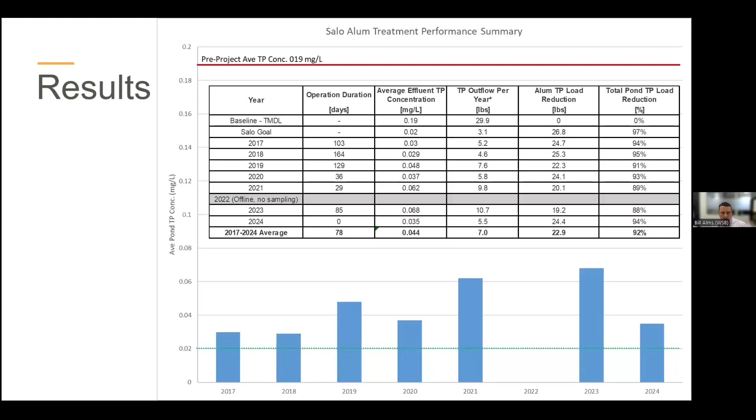I'm almost wrapped up here, but I'll add a little bit of clarity on what's going on with Silver Lake. A lot of projects in the watershed, some internal, some external. But one of the nice, or big key stories that we're seeing in Silver Lake, is the clarity that's coming.

We're seeing over 20 feet of clarity on Secchi readings shortly after this project - probably contributed to it - but we're definitely seeing an upward trend in clarity in the lake, which has been very positive.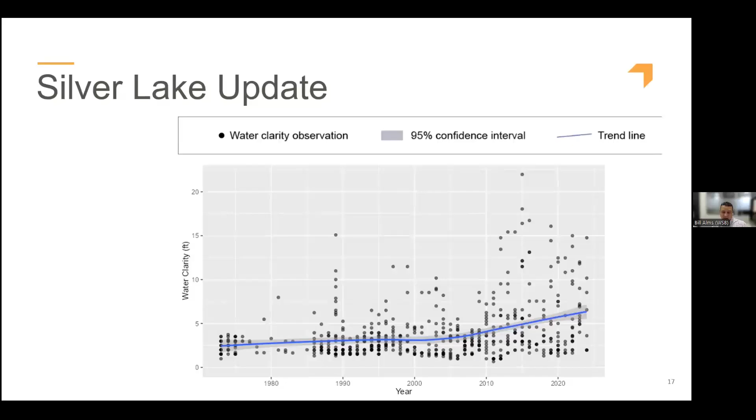And the lake is currently being evaluated for whether to be delisted as no longer impaired. So very, very positive results from that standpoint as well.

With that, I think that pretty much wraps up the summary of this more permanent alum treatment system on a pond.

Why did you decide to send the phosphorus back to the sanitary system, as opposed to putting it back in the pond but inactivating it in the sediment? That was definitely a component of evaluating whether we just use the ponds as the reactor to hold the sediment. One thing that comes into permitting in Minnesota is that alum treatment systems in ponds are a specific regulated activity as part of the city's MS4 permit, and the amount of aluminum and other constituents are controlled in terms of the annual dosing and concentrations that can be recorded. So one of the ideas was to capture and remove both sediments and other particulates and send them to the sanitary system to reduce that buildup in the pond. There's still some that goes in there, but yeah.

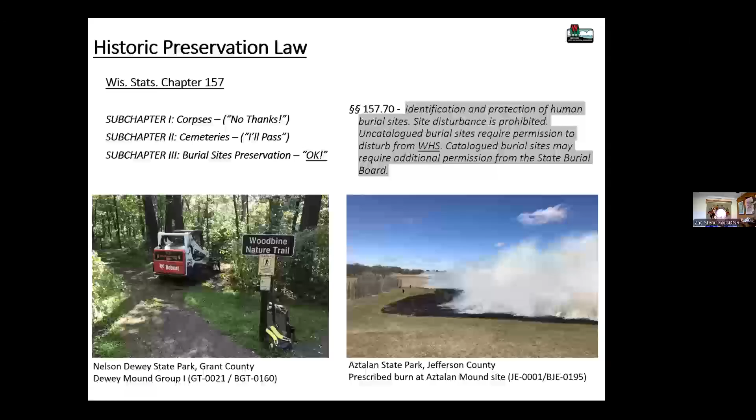All right, and then lastly, I'm just going to briefly touch on Section 106 because it doesn't come up too often with stormwater permitting, but it does occasionally come up. Section 106 of the National Historic Preservation Act requires federal agencies to consider their effects of the project to historic properties, both listed on our inventory and not listed. So this is potentially a big difference. If there are already identified resources in the area, it's kind of the same as 4440, but if there's nothing there, then additional investigations may be warranted.

Projects that require Section 106 compliance include any projects on a federal land parcel or on a parcel that was purchased with federal grant money. Projects that utilize federal grant money is a big one, and there's a whole bunch of different agencies with all their different grants that will make your head spin. And then projects with direct federal oversight as well. So those are the main ones that trigger the federal historic preservation law, Section 106.

In our case here, for example, a lot of waterways permitting projects, this comes up a lot, sometimes stormwater, but when you get the Army Corps of Engineers involved, that's a case where at DNR HP, we sort of request that federal compliance review from Army Corps, and then we will defer to their clearance if they already completed a Section 106 review.

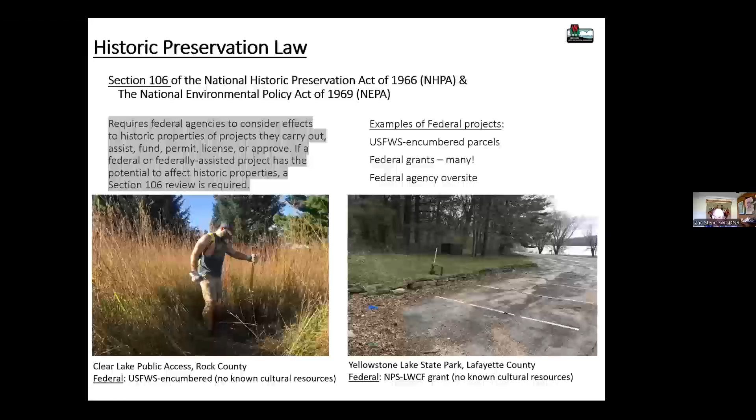All right, so the culture resource review process, as far as a stormwater permit is concerned here, again, by state law, it has to comply with 4440 and 15770. If it's being submitted to DNR for permitting, that falls under the umbrella of these state historic preservation laws. So I'm going to walk through a couple of examples of projects that have come across my desk in the past couple months, and show you how we handled each one. I have an example of what we call a false alarm, with no cultural resources coincident, an example of an archaeological site, an example of a historic property, and lastly an example of an archaeological burial site.

For this first project example, the false alarm example, this was a project submitted to our stormwater team for review. The project is to redevelop a parcel and turn it into a car wash place called the Foam Farm, which I had to read a couple times before I figured out what it was actually doing.

For the initial screening, applicants send in the project to Stormwater at DNR for permitting. Our section reviews projects and looks at what we call the quarter maps for cultural hits. Instead of actually screening the whole database for specific polygons, we have an agreement with our reviewers to send us anything within a quarter section of a project, just so we can catch projects that may be mismapped or adjacent to an archaeological or cultural resource site that needs further attention.

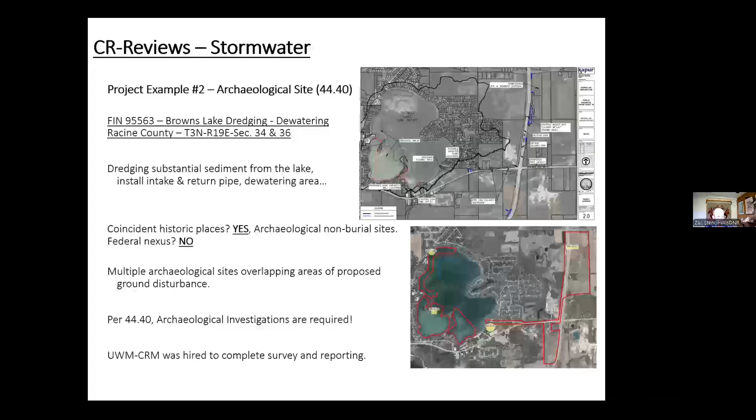All right, another example, this one involved historic buildings. So another 4440 compliance project. This one involved the construction of Kalahari Lake Delton tree houses, so another bit of Kalahari action up in the Dells.

In this case, the plans were to demolish the buildings to make way for this new resort area, and you can't get any more adverse than demolishing buildings. So in this case, 4440 became involved.

When dealing with historic buildings, sometimes it can be a little confusing, and I'm not an architectural historian. So if I can't determine whether a resource that's going to be demoed is historically significant or not, I can defer to SHPO for their review of the project. In this case, I sent the project to SHPO for additional review to determine if the buildings were, in fact, historically significant, or as we call it, NRHP eligible - meaning, is it eligible for listing on the National Register of Historic Places?

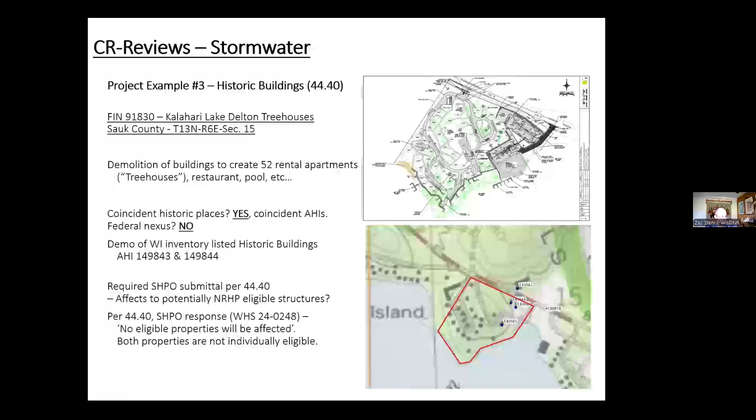So again, per statute 15770, the permission to disturb a human burial site is required. In this case, the applicant took it upon themselves to complete that request, following the steps I'll share with you in a minute. Once they received that permission from WHS, they forwarded it to us for project clearance.

I'm going to get through this pretty quickly here. So basically, what can you do to make this process smoother, to get ahead of the game? The first thing you can do is pre-screen your projects.

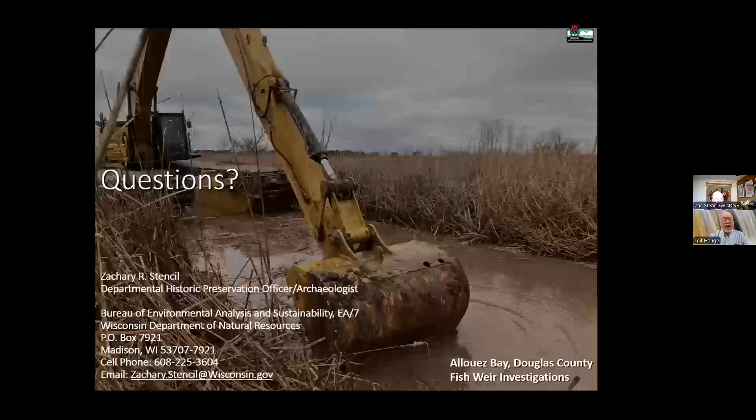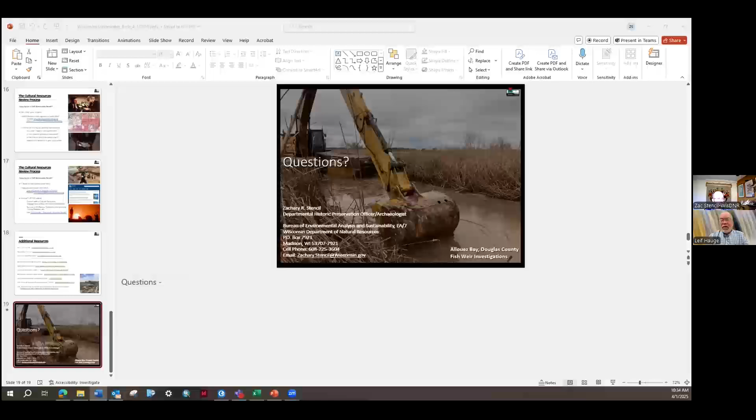We've already posted a PDF version of your presentation, which has all the lists and stuff you provided, but none of the links will be live. I'm wondering if you could send me a copy of the PowerPoint, the PPT file. Are you sure the links don't work? I was able to open the PDF in Acrobat, and you could click on them. Oh, then in that case, never mind, we'll post that and hopefully it works. Yeah, give it a try, Leif, and if it doesn't work, then of course I can definitely send the file. I just assumed that in the PDF they would just be frozen, basically.

Well, Zach, that was really great. Thank you very much. You bet. Thank you.

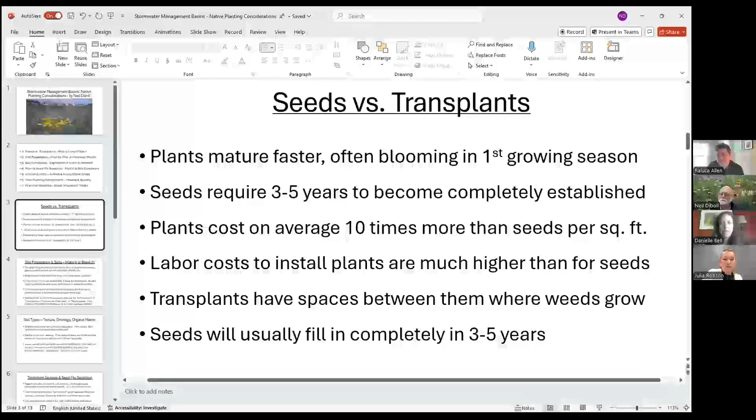All right, can we move on? Ready? Yeah, next slide please. All right, you got it.

So for site preparation, obviously we want to be as completely free of perennial weeds, grasses, woody material, and roots as possible. It depends on the situation, but usually we don't see that when dealing with engineered soils. When you get into local substrates, that can be problematic because you have no idea what's in there, and oftentimes the contractor may not have prepared it properly, and there's rhizomes of quackgrass, brome grass, or Canada thistle. Who knows what's in there if they don't follow proper procedure. If you have compacted layers, especially with heavy clay soils, that's got to be broken up or there'll be no infiltration. Fertilization is rarely an issue, except for deficiencies of certain macronutrients like phosphorus and potassium, or what I call the mesonutrients, calcium and magnesium.

So is that slide cut off? Can you all see that okay? Yeah, I think if you hit the slideshow button down at the bottom right, it should go full screen. That's in the bottom right of your screen. Okay, where is that? It's the little thing with the upside down T on the bottom. I am not seeing that. Let me see here, why am I not seeing this? This is odd. So slideshow. Oh, here we go, let's try this. I think I didn't get it in the right spot. There you go, how's that? There we go, yep, okay. I didn't set it up right. Thank you very much, okay.

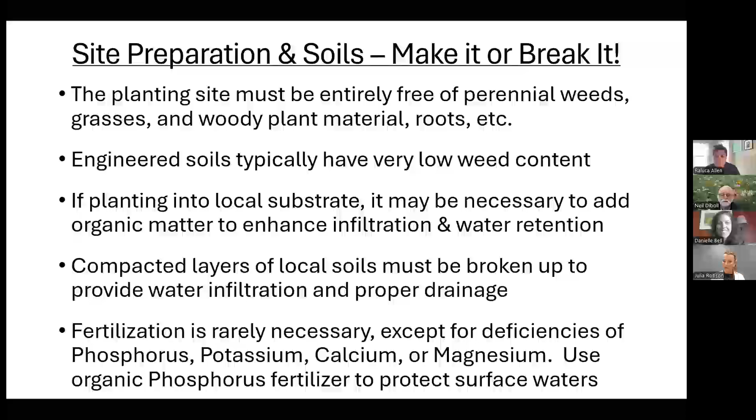So we talked about soils. One issue is local sandy soils—they already provide excellent infiltration, but they won't support wetland plants during summer dry periods. So you have to adjust your mix to broadly adapted generalist species, like big grasses such as big bluestem. If height isn't an issue, switchgrass and big bluestem have extensive root systems that stabilize and encourage infiltration, and they'll grow from dry sand to almost a wetland condition. Then you add broad spectrum plants like bergamot, yellow coneflower, and stiff goldenrod—species with broad amplitudes that can tolerate flooding for 5, 6, 7 days but also tolerate drought for a month.

Did anybody have any comments on soils?

When you say clay-based soils, you're talking like 30-40% clay? Yeah, like silty clay loams, even silt loams—they don't have that great an infiltration capacity, so it defeats the whole purpose. So then you ask, what do I do, assuming they're not compacted where you'd have to dynamite them out? You can always add organic matter, but the issue is you can only add soil amendments so deep into the soil, so the deeper soil profile will still be limited in its infiltration capacity just because of the tightness of those clay and silt particles.

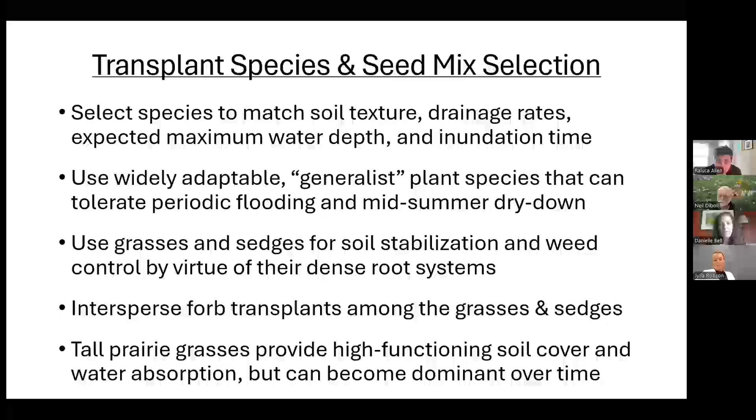And the species that survived that inundation was Schoenoplectus americanus, formerly known as Scirpus americanus. So now you know. Thank you—I wanted to make sure I got my numbers right. It wasn't a Carex at all, that's why I couldn't think of it. It was a Scirpus, now Schoenoplectus.

So, erosion control strategies—you guys, I think this group has probably more experience than I do. We've had bad experiences with coir mats for seedings. This is different from transplants, this is for seedings. But you can see here, you've got to have an erosion control mat or the game is over for sure, and you don't want too heavy a mat or else certain species can't emerge.

And as I mentioned, Excelsior has worked well for us. You can also use jute matting, which doesn't have an inner core of straw or Excelsior, but it's pretty good if you don't have a high volume, high velocity situation. And then we use a nurse crop of oats at about 1 pound per 1,000 square feet, which is 43 pounds per acre, rounded up to 50 pounds per acre, for rapid soil stabilization.

That in coordination with the Elymus virginicus canadensis gives you really good cover the first year. If you're doing a dormant seeding, you've got to have that in no later than mid-September, because you need enough germination on that cover crop of oats. You're going to triple or quadruple the rate since this is a dormant seeding, and you want the oats to come up and completely occupy that soil. You don't have to worry about it outcompeting the seedlings, because they're not going to germinate till the next spring. But I think many people here probably have more experience with different things they could outline and share.

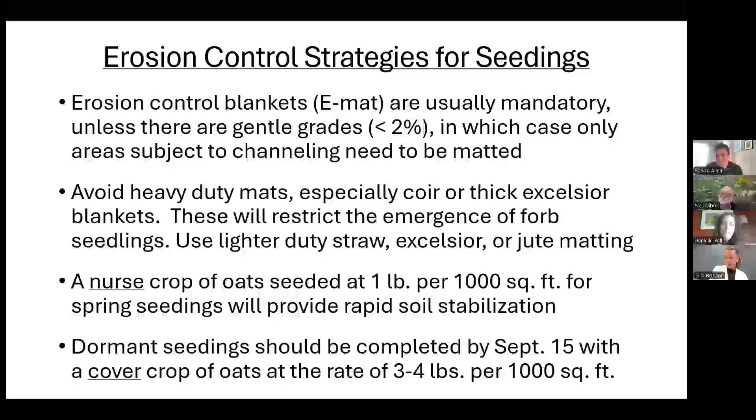Okay, so I changed this a little bit from the version I sent you all - I just changed it this morning, something I had forgotten to include. Oftentimes in wetland situations we can't use some of the more standard pre-emergent herbicides - again, this is for transplants now, not seeds. Often the classic methodology for weed control in a perennial garden, similar to what we're doing here with transplants, is you put in the plants, put down a pre-emergent herbicide, and then put mulch around the plants. That pretty much sets you up for the first year with very few weeds.

Well, we have two issues in bioretention basins and other water management situations: we may not be able to use certain herbicides because of toxicity, and the mulch, as was pointed out earlier, washes away, accumulates, and buries plants or seeds. But there are other alternatives, such as corn gluten, which is a non-chemical natural product that's good for usually, I think, 4 to 6 weeks of weed control.

So you do have to reapply it. And you also have these new, low toxicity pre-emergents for vegetable gardens that could be acceptable in an aquatic ecosystem.

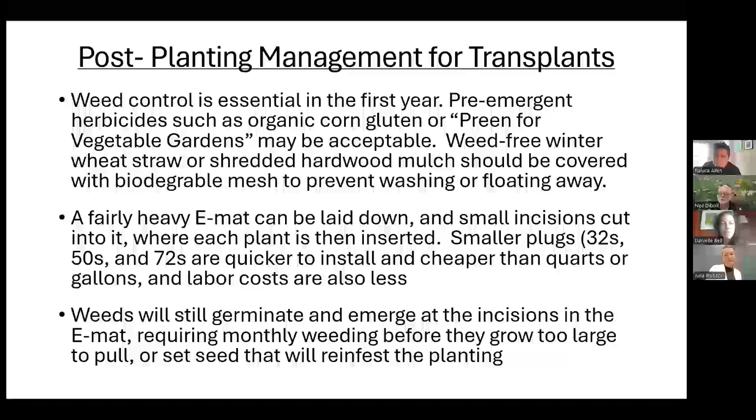And I have a question: has anybody put in plants and then just put jute over it to hold things in place? It's something I have never done, but this is an interesting process we're going through here. Has anybody just put a jute matting over it to hold everything in place? It seems like it would work, but I've never done it. Nobody? Okay, well, there's an experiment to try.

By the way, we've got time for one, maybe two more slides. So, okay, here we have post-planting management procedures, post-planting watering. I think that's it. Yep. Okay, so we're almost there, good. Okay, so post-planting management, we're almost on time.

So typically in the first year of a prairie or wetland seeding, when weeds reach 1 foot, we cut back to 6 inches. You don't want to bring equipment in there and mess it up, especially if it's damp, so string trimmers are best. Second year, biennial weeds can be a problem, like sweet clover, wild parsnip, burdock, etc.

All of these are determinate bloomers that can be stopped from seed formation by cutting them back to 12 inches just after they finish blooming. If you cut them before blooming or during blooming, they will rebloom. But if you cut them just after they finish blooming, they will not rebloom, and the seeds will not have formed yet, so you will stop that cycle of reseeding of the biennials.

The only exception to this is Queen Anne's lace, Daucus carota, which is an indeterminate bloomer. You can cut that thing again and again and it just reblooms, even from 3 inches tall. It's horrible. That beautiful little Queen Anne's lace is the nemesis of the biennials.

But all the other biennials I deal with, including bull thistle and nodding thistle, can be stopped in their tracks by stopping the process of seed formation, cutting them right after they finish blooming at 12 inches. By the third year, if burning is an option, burning in spring to remove old plant material and stimulate new growth is great.

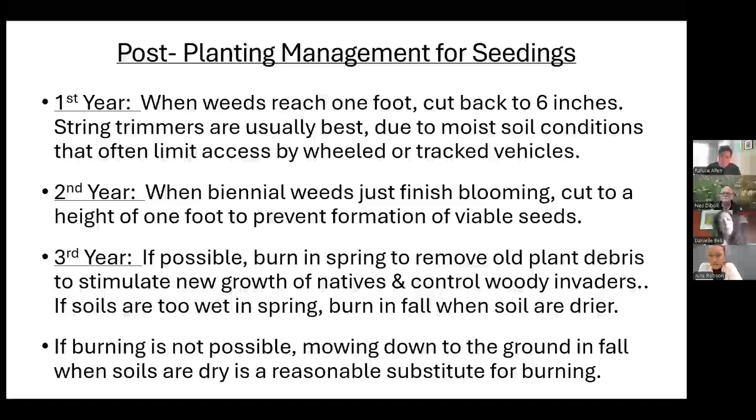Let's do the last slide really quick, and then we'll be at time.

So, watering, should we or shouldn't we? If you're putting transplants in the spring, you want a watering system set up, or some methodology of watering, because if you have a dry spring and lose all those plants, that's a big cost. You may think you're out of the woods by July, but if you get a really dry stretch, you still want to be able to handle a drought situation with water. Once they're established after the first year, you're home free.

If you're going to install transplants in September, I'd suggest they be in no later than September 30th, so they have time to establish root systems before cold weather. You'd want to water them in unless the soil is damp, I like to make sure they're watered in. They shouldn't require further watering that fall unless there's an extraordinary hot, dry stretch, but I've never seen a problem with that. The only issue is the next spring, although they're partly established, if it's dry they're going to need water too, under duress.

So as far as seedings go, a fall dormant seeding typically doesn't require watering the following spring, but we've seen dry springs where watering will make a huge difference even with fall dormant seedings because they're not getting rain. There are certain species that have certain time windows of germination based on soil temperature or day length. They only germinate at certain times, and if it's dry during that time, you will not get germination, and you'll miss a year. Those seeds may or may not overwinter to come up the second year. If not, you will lose that species from your planting. So watering is a really important insurance policy, especially if you have a dry spring or summer.